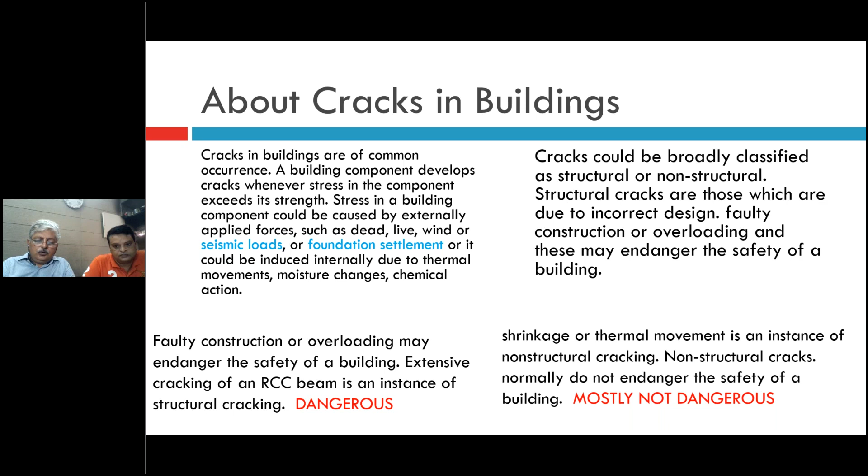Yes, now we have classified some of the common causes which develop cracks in buildings, which are enumerated as moisture changes, thermal variations, elastic deformation, creep, chemical reaction, foundation movement and settlement of soil, and vegetation. These are the most probable reasons encountered when we see any cracks formed.

The crack which I earlier have been discussing, you see the photograph here, you will find that the RCC slab and the brickwork are not having any bonding between them. That is why a crack has surfaced, and that crack is due to different movement of RCC and brickwork in the wall. It is because of the composition and the time between the RCC slab and construction of the wall, that cement bonding is not there.

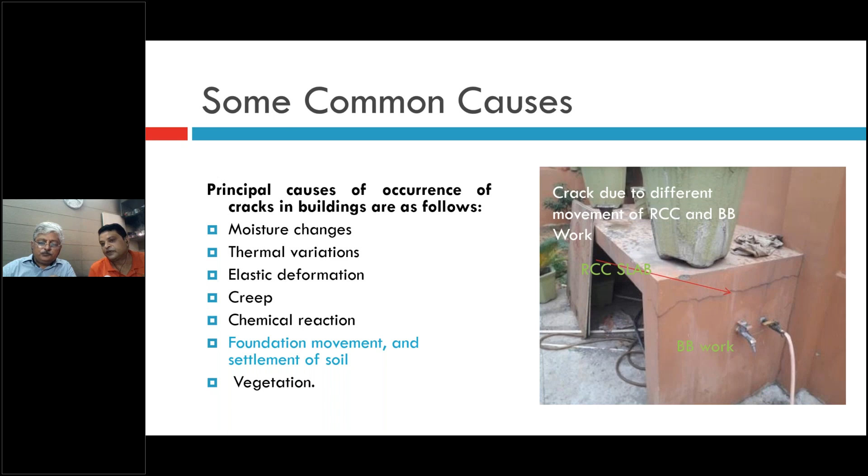Fine. Let us go to next slide.

So now, first of all, we will discuss moisture as a cause of the cracks in the building. The building materials having pores in their structure in the form of intermolecular space, as for example, concrete, mortar, burnt clay, bricks, stones, timber, expand on absorbing moisture and shrink on drying.

These movements are reversible, because in every monsoon you will see that your doors are not closing properly, and in extreme hot weather, means in summer or in winter, they are working quite fine. But whenever the moisture is there, in those days, your doors are not working well. They are not closing. So these are reversible because with time they come back to their original position.

So apart from the reversible movement, certain materials undergo irreversible movement due to initial moisture changes after their manufacture or construction. Instances of irreversible movements in the material are shrinkage of cement and lime-based materials on initial drying, and expansion in burnt clay bricks and other clay products on removal from kilns. Fine. Now, this is basically how moisture is acting upon the different quality of materials.

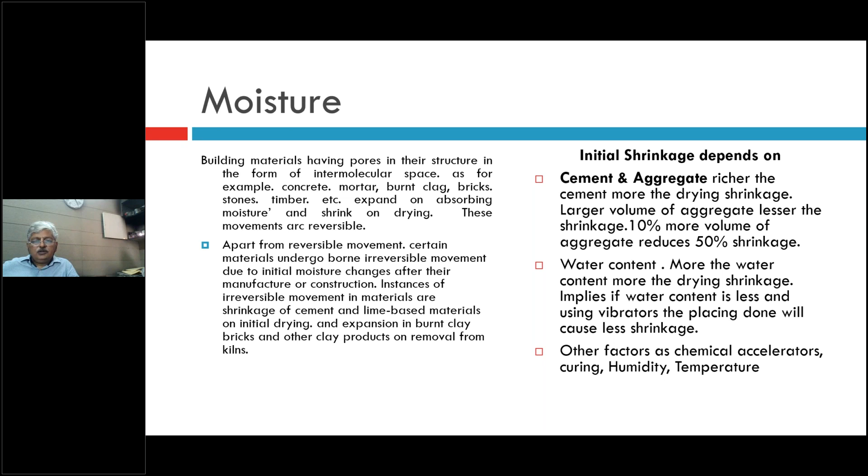Now, here we come to the second cause of cracks. That is the thermal movement. All the materials expand and contract due to cyclic temperature variations, and magnitude of movement depends on each material's molecular structure. If there is restraint in movement, tensile or shear stresses are caused, resulting in cracks. Further, at joints of two materials there will be differential thermal movement, and thereby cracks at such points are common.

You see, thermal movement happens most of the time in RCC slabs because they have a wider surface exposed to sun and heat, and all these cracks which we see along the horizontal, along the front elevation or the side elevation, where the RCC slab is, we will find lots of cracks happening there, and this is because of thermal movement.

Because most of the time we keep on saving on the tor steel bars, and these thermal movement cracks can be contained by bending the temperature bars to a certain length inwardly, so that the expansion of tor steel goes inwardly, and then cracks won't appear.

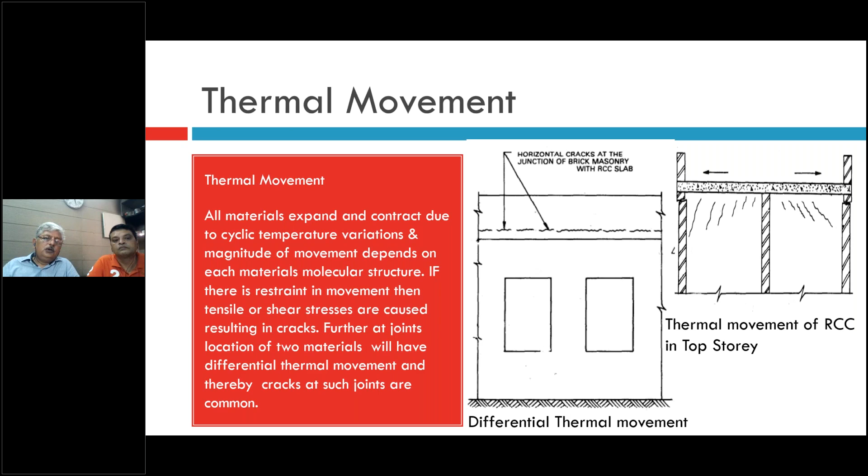Now, elastic deformation. Structural components of a building such as walls, columns, beams, and slabs generally consist of materials like masonry, concrete, steel, etc. and undergo elastic deformation due to load in accordance with Hooke's law. The amount of deformation depends on elastic modulus of the material, dimensions, magnitude of loading, and dimension of the components.

Now, here is an example. A load-bearing wall having large opening will cause differential strain in loaded and unloaded wall. In figure A, will act as pillars, and stressed more than B portion, resulting in differential stresses, and vertical shear cracks can occur, and same can be avoided by RCC lintel or slabs over opening having shear resistance.

Means we have to have lintel or RCC slabs, or maybe even your wooden lintels can do to contain such sort of losses. And these losses are again because of elastic deformation, and these losses again are not payable in the policies. But most of the times, whenever any earthquake comes, most of the surveyors do give such losses, but definitely these are not because of earthquake. So you please make sure of this.

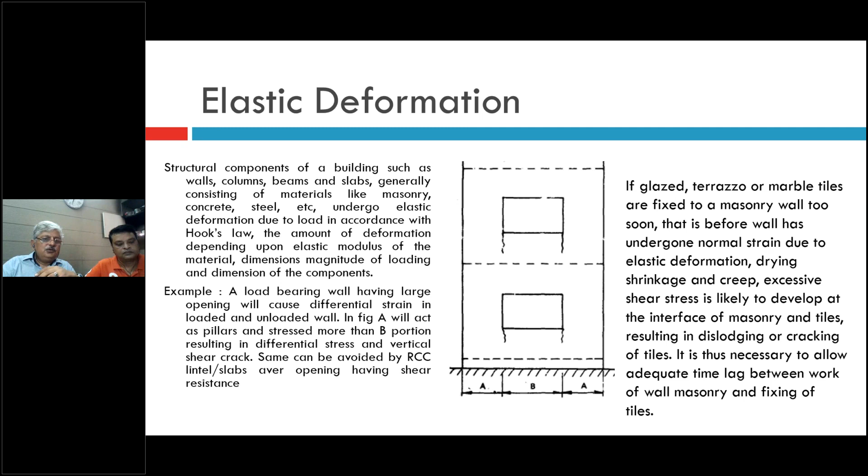For first year, we have got to take 2% or maybe 3%, and for rest of the time you have to divide rest of the period by 100 and keep it maybe 0.75%, or maybe 1% or maybe 1.25% or 1.5%, that you have got to see, and you have got to go through the different manuals and CPWD schedules regarding that. So you have to keep all these things in mind while you are assessing the loss. Now we come to creep and chemicals.

Some building items such as concrete, brickwork, and timber, when subjected to sustained load, not only undergo instantaneous elastic deformation but also exhibit a gradual and slow time dependent deformation known as creep or plastic strain. Like, I will give you an example here.

Whenever you are pressing anything down, and it has got elasticity, it will come back. But definitely it will not come back to its position where it was. With every pressure, it will develop creeps, that is called creep. And these creep losses, these are again gradual losses, and our policies don't cover gradual losses. They are slow and time dependent deformation, and all our policies are covering instantaneous losses which are happening within a wink of an eye, which is unexpected.

This is expected, this is gradual, this is happening, and you can't see it is happening unless you are particularly seeing it. Otherwise, you look around yourself, you may see thousands of cracks in your walls. Right now, you just have a look at it. So these are the creep or temperature damage, thermal elasticity, or whatever. These sort of losses are definitely not payable in the policies. We must take care of it.

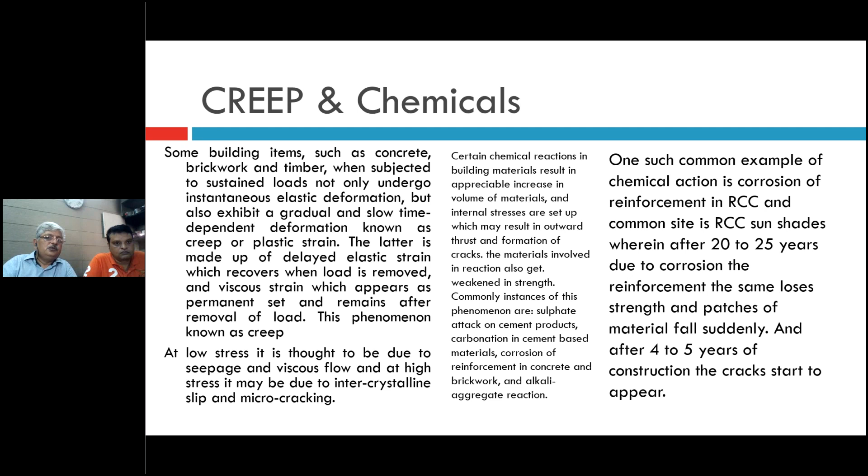So creep and chemicals is again one category of the loss which causes cracks, and these chemical reactions or creep formation, it is not instantaneous, it is gradual, it is happening with passage of time, and none of our policy covers such sort of decaying procedure or phenomena. Fine. Now let us go to another reason.

So again, this loss, in our opinion, is happening because of design failure, because you have not followed either design, or you have used substandard material, or you have not given enough of time to settle down the things, because of the reason I have told you, that whenever somebody wants to construct the house, he immediately wants to do all the things within no time. He wants to even shift into it. So you have got to give everything a proper time to settle down. Only then you have to start the another process.

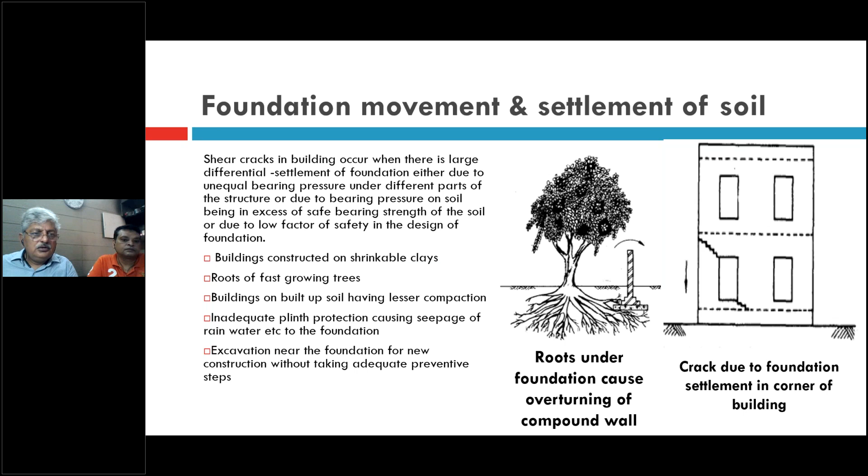And definitely that is not a case of subsidence, that is case of settlement of soil because of what you can say design failures. I mean, you have not constructed it well, bad workmanship kind of thing will come into place, and that loss is not again payable. Now, permeability of concrete.

The deterioration process in concrete starts with the penetration of several aggressive agents and is a major cause of cracks on walls. Essentially, permeability dictates the capacity of concrete to survive weathering action, chemical attack, or any other process of deterioration. Hence, low permeability is the main factor in concrete resilience.

There are several factors which control concrete permeability: number one, water cement ratio; number two, curing; number three, air voids due to deficient compaction; number five, use of admixtures; number six, micro cracks due to loading; number seven, cyclic exposure to thermal differences and oldness of the concrete. Now I request Mr. Tagotra to please.

The concrete, once it's placed, starts to deteriorate, you can say it starts to depreciate. Now, you are saying about which concrete, which has been mixed with water and has not been put to use? Like sometimes I have seen that they cover it with sand and next day they again come and put some more water and try to fix it. No, not that. So say once we have placed an RCC slab on the roof.

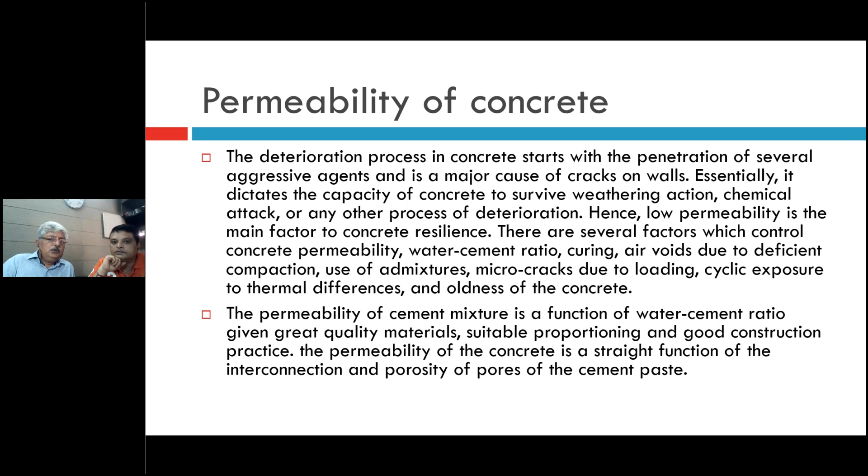And bad workmanship or structure defects are not payable. Any loss which is occurring because of this is again out of the scope of the policies which we are discussing. Right? Now, here we give some examples. The brick aggregate in base concrete of the flooring contains high soluble sulfates, more than 1%, and the water table is high so as to cause long spells of dampness in the base concrete.

You see the water table is high at the base here, touching the base concrete at ground level. The latter will, in course of time, swell up, resulting in upheaving and cracking of the concrete.

Let me give you an example of an RCC slab. For insulation, so that heat is not coming to the interior of the building, we provide brickwork or tile work over it after using mud. Am I right?

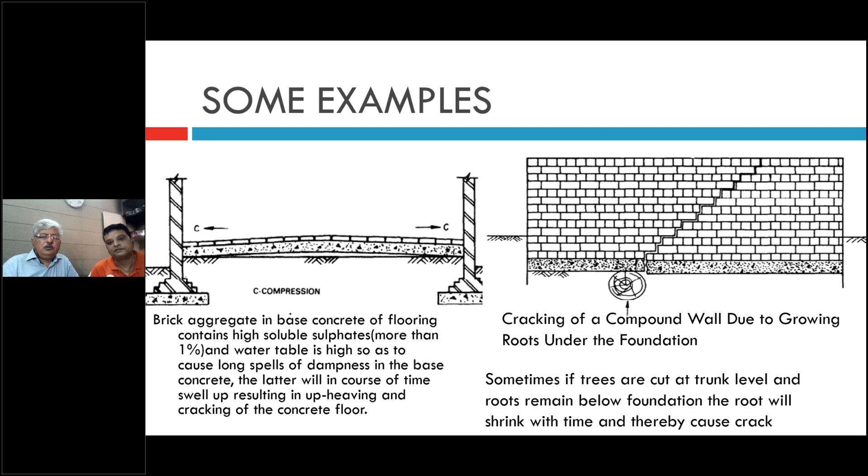Now, vertical cracks around staircase opening caused due to drying, shrinkage, and thermal movement. So you see in this building, because of thermal movement and shrinkage and drying movement, losses are likely to occur at these weak points, where large openings are there, and no RCC or wooden lintels are provided. The cracks will develop here.

Now, vertical cracks around the balconies due to drying, shrinkage, and thermal movement. So you see, this is the balcony, and this is resting on a reinforced cantilever kind of construction, or maybe because of expansion of cracks, it will make more expansion, pushing the wall from here and developing a crack here.

Again, this is what you call your sunshade, which will expand from here, and definitely it is going to develop a crack here. And these are the vertical cracks, and these are again because of shrinkage and thermal movement. So these cracks are not payable.

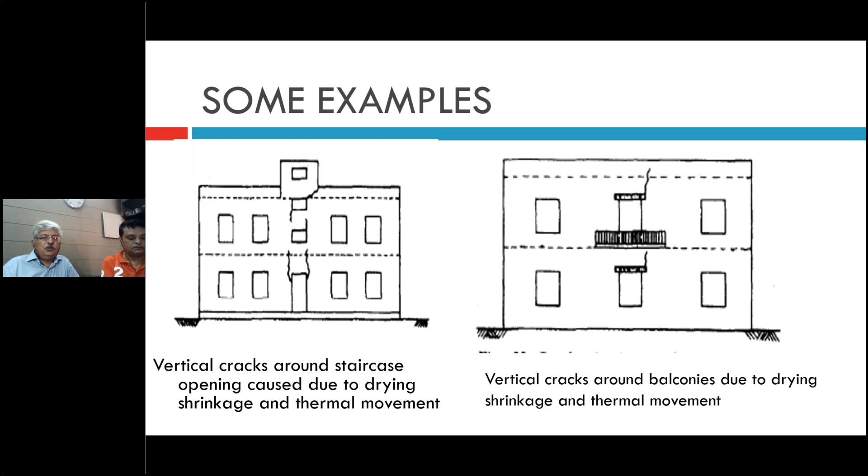Now, horizontal cracks below RCC slab, that is what we have discussed earlier. Horizontal cracks in the topmost story below slab due to shrinkage and deflection of slab because of temperature variations. This will happen at the top, because on first floor or ground floor it will not happen, because the weight of whole of the structure is resting on it. It won't let it happen, and that is upliftment of the RCC slab.

So you can see the crack here because of all these movements, shrinkage or deflection of slab, or maybe because of thermal movement. Now here we come on this another.

We are sorry that we have not given a figure number. Otherwise, it would have been easy for us also to discuss. So we will try to give you much more quality, because we are also in learning stage.

Now, horizontal cracks at top story window lintel level due to pull exerted by slab due to drying, shrinkage, and thermal contraction. So here, these are the losses made by either expansion or contraction because of the atmospheric thermal movement.

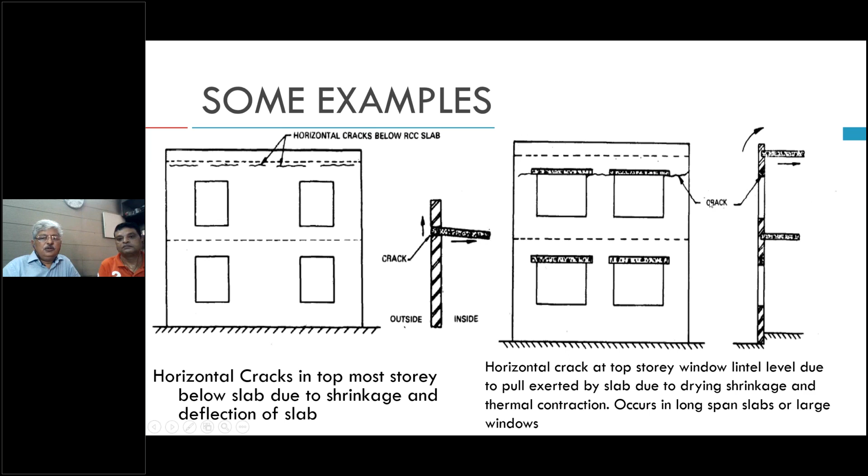So another example is here: horizontal cracks at corner of the top story due to lifting of corners of building caused by deflection in slabs, prevented by making provisions of corner reinforcement in design.

So this is what I have been telling you, that in cost cutting or in saving some money, because we have to hold the temperature bars, because there are two types of bars used in RCC slab. One is called temperature bar, the other is called load bars. Fine, and temperature bars have to be folded 1/8 of its length on both sides so that any expansion is coming back within, so that there is no upliftment of corners.

So 1/8 and 1/8 means 1/4, means 25% you have to pay extra for it, and nobody pays, and that is why these losses do occur, and that is bad workmanship or design failure kind of thing. And this is all again out of the scope of the policy.

Now here we come: diagonal cracks in brick masonry over lintel of the long span opening due to shrinkage of concrete. You see, whenever anything is dried, it shrinks. Whenever anything is exposed to cold conditions, it again shrinks. Whenever anything is exposed to heat, it expands. So these diagonal cracks are formed not only because of expansion, they are also formed because of contraction of the concrete in the hostile weathers. Fine.

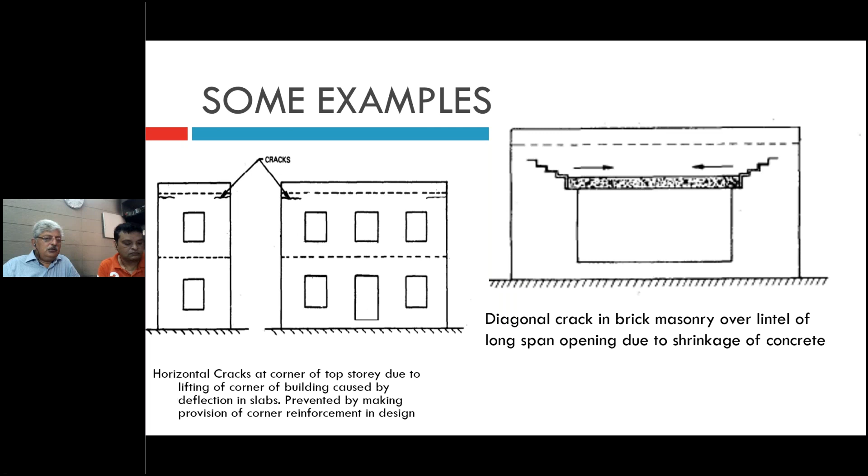Now, corner cracks in panels of concrete flooring occur because of the curling up of corners due to differential shrinkage between the top and bottom of the slab. When load comes on the floor, curled up corner give way and develop cracks due to tension on the top.

Now here you see, because of movement of sand, number one, cause number two, because of curling up of corner due to differential shrinkages, because certain constituents of the building, certain materials of the building, have different characteristics. Some are drying early, some are drying lately, and whenever such thing comes, like if glaze tiles are there, glaze tiles are non-porous and insulated with ceramic or vitreous coating, and they don't let the

moisture evaporate, and that moisture, when it is collected within, loosens its corners; it tries to come out of the corners to escape into the atmosphere. Then a little bit of corner upliftment is there, and whenever we walk on it, they develop cracks, and these cracks again are because of this phenomena of shrinkage, again a defect. Now, here we come.

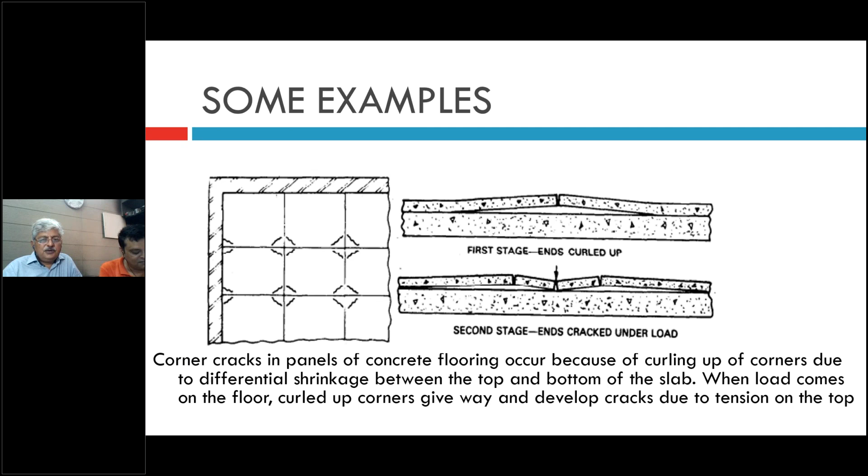So that requires immediate attention of yours, because that accumulation of water may be corroding your steel in the RCC slab. So corner cracks in the panel of the concrete flooring occur because of the curling up of the corner due to differential shrinkage between the top and bottom of the slab. When load comes on the floor, curled up corner give way and develop crack due to tension on the top. So this is what I have tried to convey to you in very simple language. So this loss again is not payable.

Then diagonal cracks in the brick masonry over lintel of the long span opening due to shrinkage of concrete. Now I want you to please express this. This happens when RCC lintel is placed and the brickwork is also done simultaneously up to the roof level. Fine. Now the RCC slab will shrink. Initial shrinkage will cause such cracks. That's correct. These are more prevalent in new constructions.

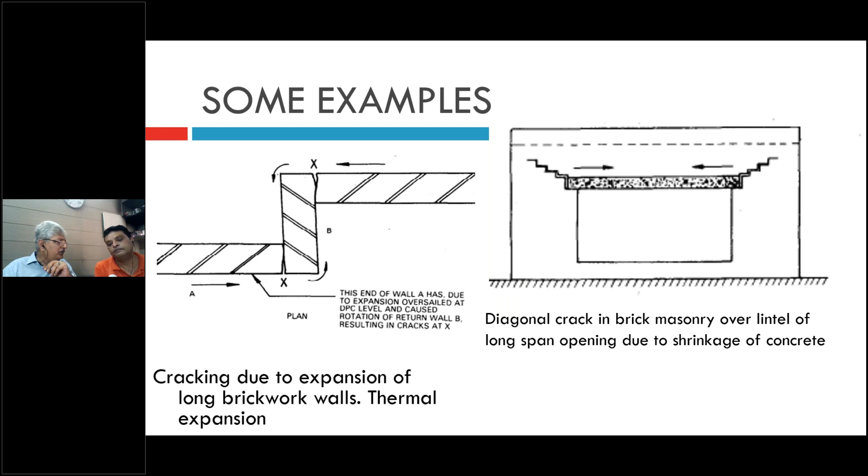Now, vertical crack in brick panel wall of frame structure due to expansion of brickwork. So this is the crack in the brick panel wall of the frame structure, because the frame structure is first made and then it is filled in with the wall, which is called perfect party wall in our insurance parlance. And whenever such thing is, since RCC is more strong, it will try to push it outwardly, but it cannot, because of its own characteristics. Then it will bulge outwardly, and that bulging out is again because of expansion of brickwork,

because of moisture contents, or maybe because of heat, or maybe because it has got pores to the extent to hold 3 times of its weight of water or maybe air. And whenever air is getting into it, it becomes compressed, and definitely that compression will expand its volume, and definitely it will bulge out. And that bulging out is again a gradual process, and is not payable. Am I right?

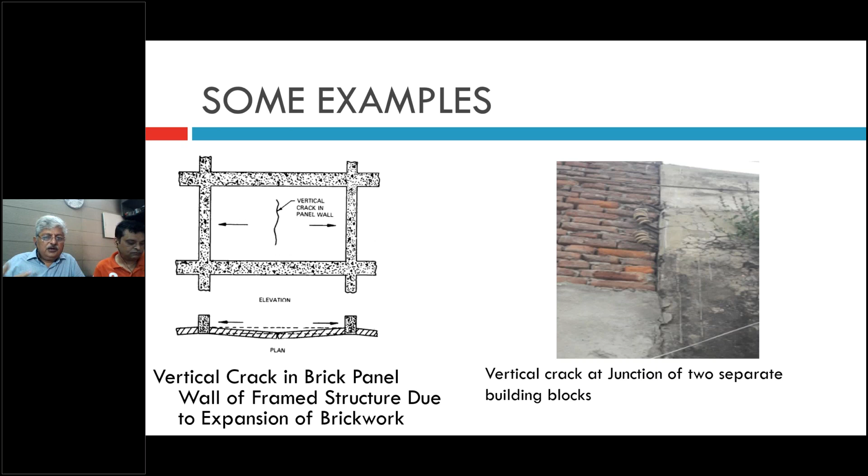That is why I have informed you earlier that every dam is made in uneven zigzag kind of blocks, so that seepage coming from one block is not passed on to the other, because that other block is having its joint way upward or maybe downward. So this is how they build a big construction of cement, and they contain the cracks and seepage and other problems.

Now, here we see this is the cracking and falling off of materials due to corrosion of reinforcement. This is what we have seen, discussed earlier. This is the picture you see. This is only because of this, and this is the cantilever. This is what I have been saying, that in side corner plots, they try to enhance their area by extending it to 2.5 feet. So this is what area we have been talking about.

Now it is the initial cracking due to thermal movement and getting expanded due to vegetation.

You see, again, this crack is happening because of thermal movement and because of winds, or maybe because vegetation has grown and its roots are going to make this loss more enormous.

And you would have seen that most of the time this is peepal tree, which is spread by bird droppings, and most of the time it is not touched. Being Hindus treat it as a very pious tree, they don't try to uproot it. So that's why these sort of cracks are moving forward exorbitantly, because of, number one, thermal movement, and secondly, it is accelerated by the roots of the tree.

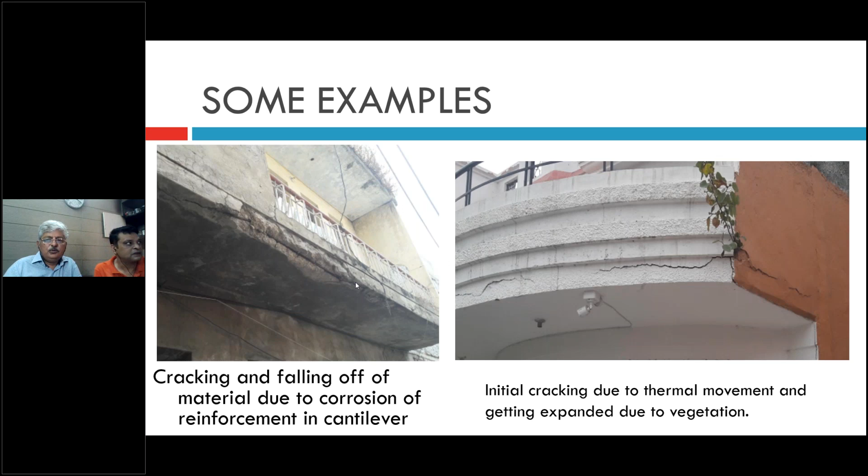Now, cracking at the junction of two pillars due to differential loads in pillar, thereby differential strain. So here you see these two shops have been made at two different times, and they could not make it identical, but their foundation was the same. That is why this differential load is there. You can see a gap in these two pillars, these two beams here, and in these pillars too. They have tried to do it. So this differential strain, because this one is a smaller pillar and this one is a bigger one.

You see, by putting in more and more of tor steel and cement, that doesn't mean that your structure is going to be very strong. It is not that. That is why you have to take help of a structural engineer to design the whole structure of your building, because it is good for you and your loved ones for safety purposes, and it will save your money also by saving on unnecessary reinforcement.

Then vertical cracks in the boundary wall due to a large tree near a wall and its roots causing the upliftment and cracking. So this photograph we have taken from Central School in Gandhinagar, and all the Jammuites who are seeing this can go and see it on the rear of the hospital. So this crack is very evident, and their car parking is there. And this crack is only because of the presence of this big tree, which you see here.

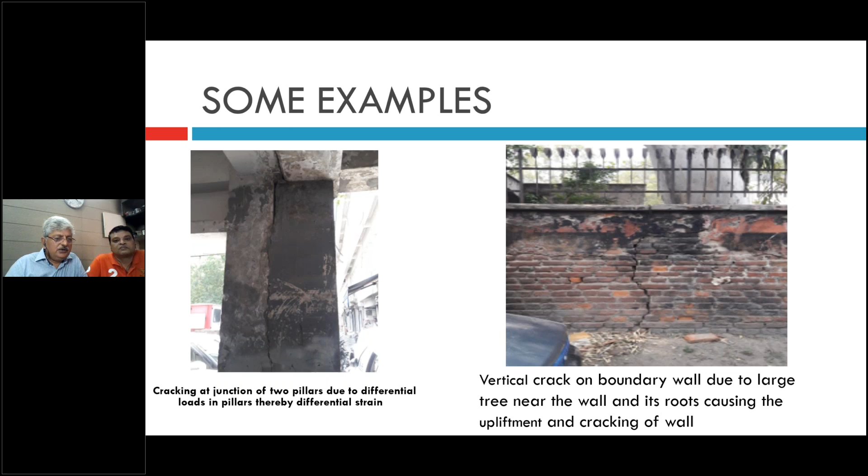Now here it is the explosion of a shop in Jammu area. You see how these cracks have happened and what is the condition of the rolling steel shutter. So you see in this photograph, there was an explosion in this shop, and this wall was the perfect party wall between these two shops. It was blown outwardly inside this shop.

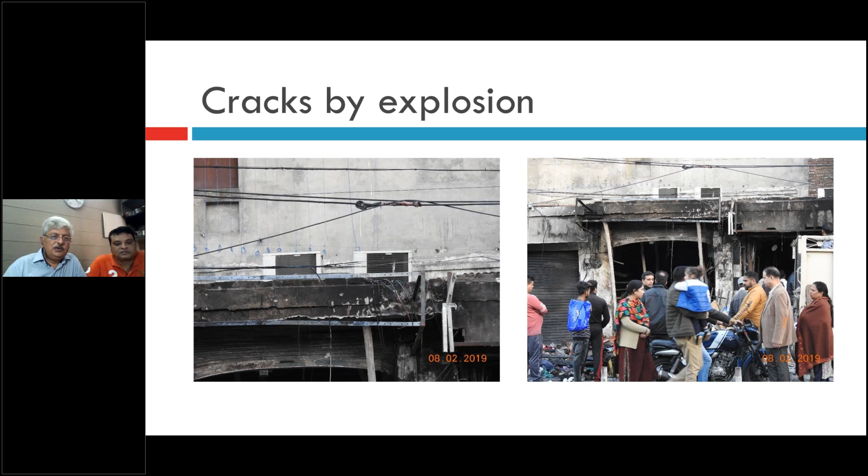So these are the cracks which are formed because of instantaneous loss, because of explosion. So these are payable. So this is how you have got to make a judgment of which cracks are payable and which cracks are not payable.

Now, these are cracks due to impact by rail, road vehicle or animal, as most of the time our policies say. So when a vehicle rams into any building and if any loss is there, you have got to pay. These are evident, these are impact loss and instantaneous loss, and it has to be paid, either by the third party portion of the vehicle's policy, or by the building policy, maybe standard fire and special perils policy or householders policy or shopkeepers policy, whatever policy it is. So this loss is payable because it is instantaneous, uncalled for and happened unexpectedly.

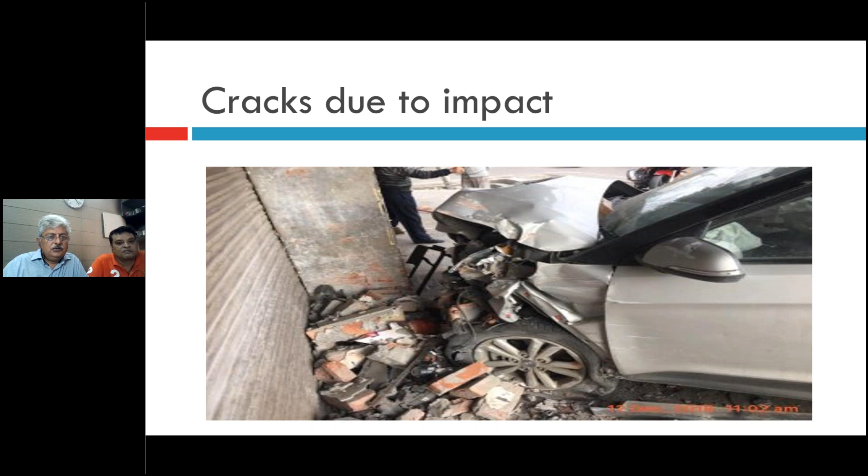Now, cracks and insurance policies. So operation of the following perils can cause major or minor cracks in some cases. The cracks caused are serious to the extent of being a reason for the collapse of a structure. These perils are covered in most of the policies, subject to certain exclusions. So crack formation by fire or explosion, implosion, this is what we have discussed.

Act of God perils. See, there are certain act of God perils, and everybody knows which peril causes which sort of losses. Now here I would say subsidence of land is an act of God peril, but it must not be confused with settlement of land, that is, compaction of soil. So here your judgment will work more. Then aerial perils is there.

Aerial perils is like, day before yesterday, a loss occurred to one aeroplane, or almost a month or two months back, one Pakistani airliner fell on inhabitation, damaging so many houses, and loss of life was also reported. And it is because of terrorism, like a blast or shooting or whatever.